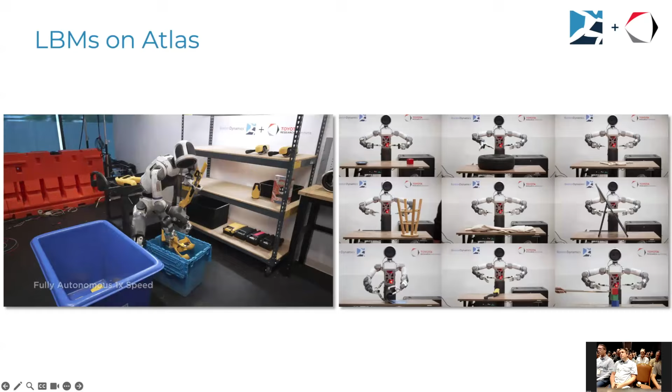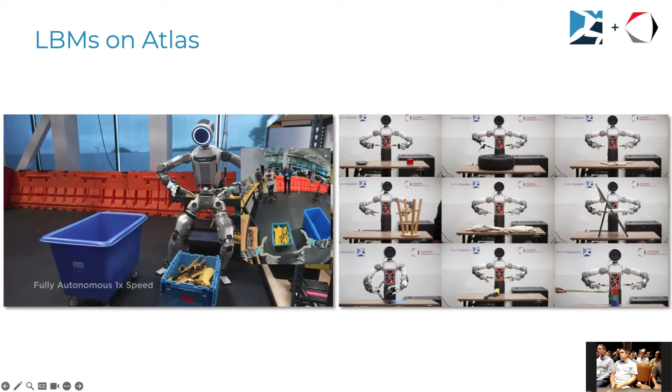It's a pleasure to follow Ben's talk because we've already set up what large behavior models are, and we can jump in here. So what you're seeing on the left is an end-to-end neural network policy, which is mapping images to actions. This policy is able to control the full range of our Atlas humanoid robot. It's able to take steps, crouch down low, reach up high, control the grippers, and control the neck to aim the head and get novel camera views. And it's doing that to complete this task here, where it's emptying this blue bin of parts and putting them into the wheeled bin.

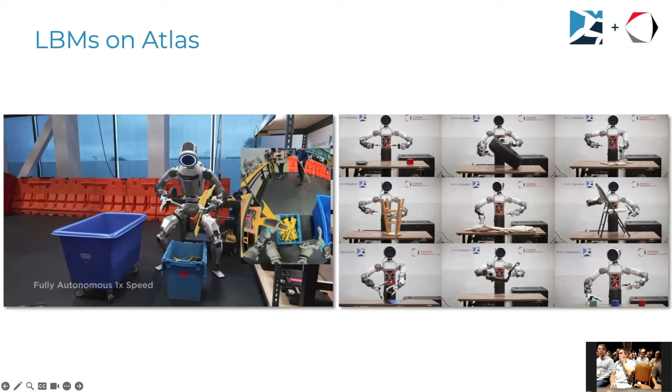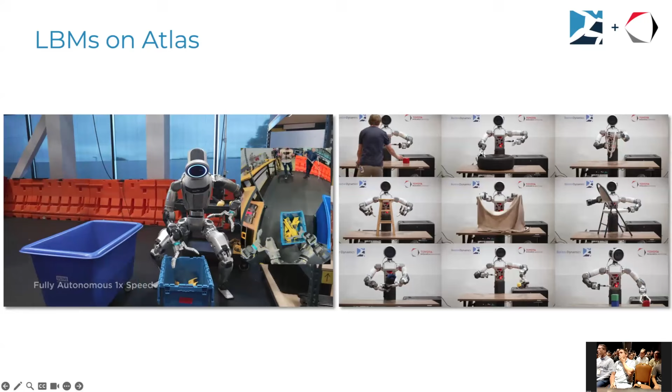On the right, you're seeing the same approach applied to our manipulation test stand, which is similar to the Atlas humanoid, but just the upper body only. Here, this is a single policy trained to complete a diverse set of tasks, including unfurling a tablecloth, tying a knot in a rope, and flipping over a car tire, for example.

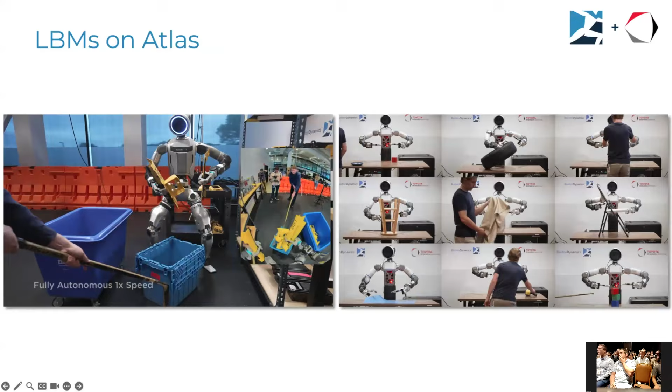As you can see, the policy is able to be reactive. If I move the bin away with the hockey stick, then the robot notices that change to the environment and reacts with its actions to pull the bin in close.

So the approach we're doing is behavior cloning, where we're going to take the binocular fisheye RGB images from the cameras on the head of the robot, as well as proprioception, so that's like joint positions and end effector poses and other robot state information, and a language prompt. Put that into the neural network, which is then going to predict a trajectory of actions. And those actions are then going to be executed by the low-level controller, in our case, the Atlas Model Predictive Controller.

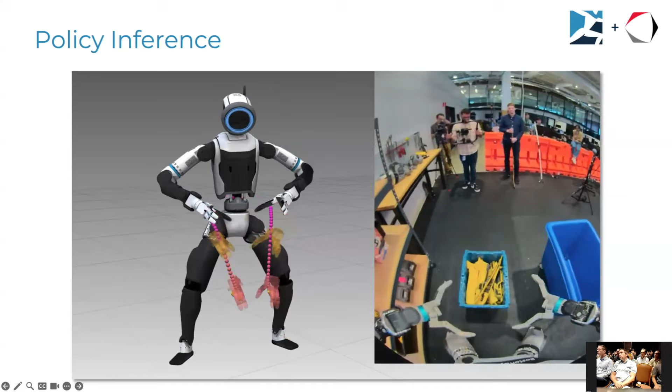So here's sort of a robot eye view of the policy predictions. On the right, you're seeing one of the images. The robot has two sort of stereo views here. And on the left, you're seeing a visualization of the actions predicted by the policy. All the videos in this talk, by the way, are at real-time speed, 1x speed.

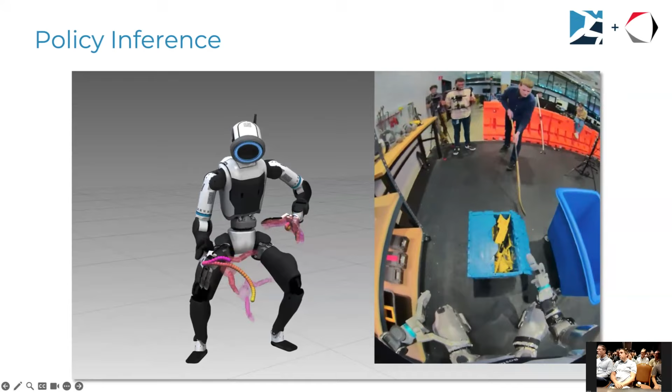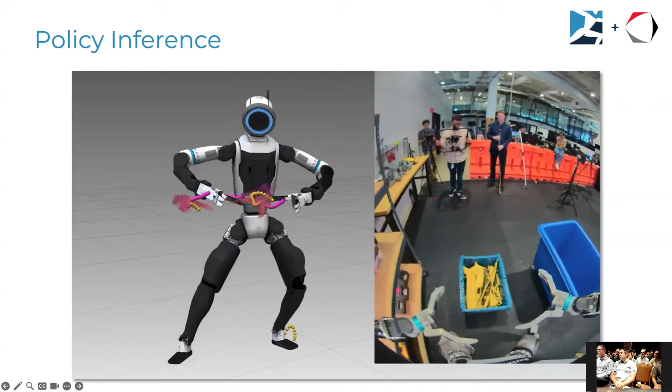So the dots you're seeing represent the positions of end effector poses, but it is predicting full 6-DOF poses for the end effectors, the feet, and the body. And the policy is predicting and updating. So every time you see an update is a new prediction. It predicts forward a horizon of actions into the future. And the controller is going to begin executing that trajectory. And while it's executing it, we're going to get a new observation and sort of switch to the new trajectory.

So behavior cloning requires a source of expert demonstrations. We developed a whole body teleoperation system to essentially pilot the robot to carry out these tasks and record expert demonstrations. So I'm going to present the Teleop system now.

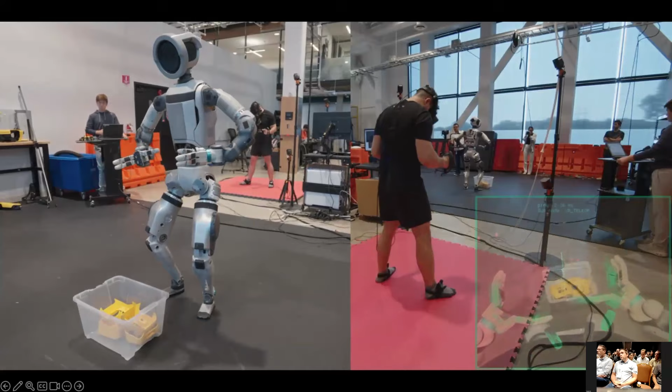This was largely developed by Kevin Bergman, who presented an even more detailed view of this earlier today at the Baymax workshop. So what you're seeing here is a side-by-side view of Kevin teleoping the robot. You can see Kevin here on the right and the robot on the left. He's actually in the background too, so you can see him with the robot. He's wearing a VR headset, and the VR headset is showing him the images collected from the robot's cameras. This gives him situational awareness, and he can control the robot using 6 points of tracking. There are trackers on his hands, on his feet, on his body, and on his head. He can crouch his body, sway left and right, or even take steps in order to complete this task. The inset view in the lower right is what he's seeing. In addition to seeing the view from the robot cameras, he also has a view of his own actions, which are these green overlays. I'll get into those in a little more detail.

Question: how skilled is he at not the task, but at controlling Atlas to do the task? It helps to have experience. Kevin is a very skilled teleoperator, particularly because he implemented the system. But he's not the only person that can accomplish a task like this. If you step into the system at the very beginning, you will not be very skilled. You do need to practice tasks for a while. It looks like he's being careful about foot, body, location, everything. Absolutely, and his awareness of what the robot can and can't do. More than him just doing what he wants to do the task. Yep. And then to do a task quickly and fluidly is different from just doing a task roughly. You can sort of stumble your way through and complete a task, but if you want to create a really nice demonstration video like this, you will want to practice and understand the dynamics of the robot and the controller, because you are teleoping on top of this system.

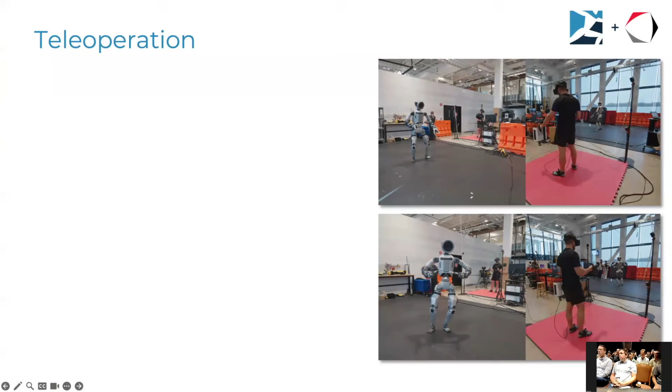So to design a teleoperation system, let's go through the requirements. First, we want a teleop system that can control the whole body to perform these tasks, meaning stepping and moving around, reaching all the way down to the ground.

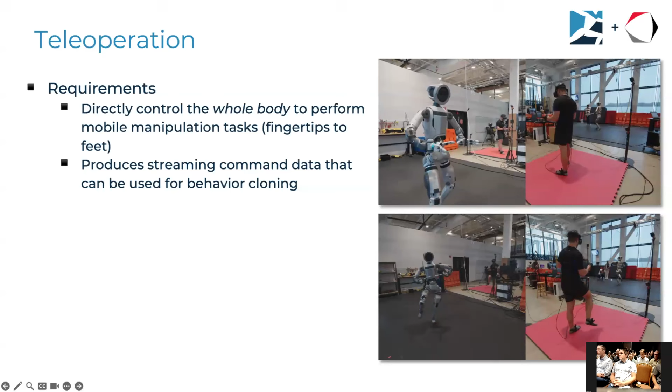That set of requirements made us make some design decisions, as well as we want the teleop system to produce a stream of commands which are learnable by the policy. You can make a very complicated teleop system, but you want to make sure your teleop command stream is aligned with your action space that the policy is actually going to be able to learn.

At the top left, you're seeing Kevin catching a bike tire as it's rolled to him. That's demonstrating he can be reactive. The latency is low enough - not zero latency, but low enough that he can react to things in the environment, and he can time a swing of the hand with opening the gripper to throw objects.

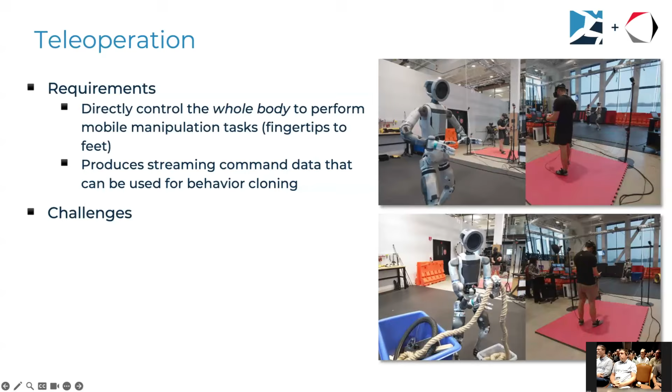There are challenges with developing a teleop system for a humanoid. First, line of sight is a challenge. If you weren't wearing the VR goggles and you were just going to stand next to your robot and observe it, you wouldn't have so much latency to be the problem because you'd be able to see things in the real world. But there would be problems with occlusions - the body would often be blocking the interesting parts of the manipulation task, or if you're reaching into a shelf or a bin, you just wouldn't be able to see.

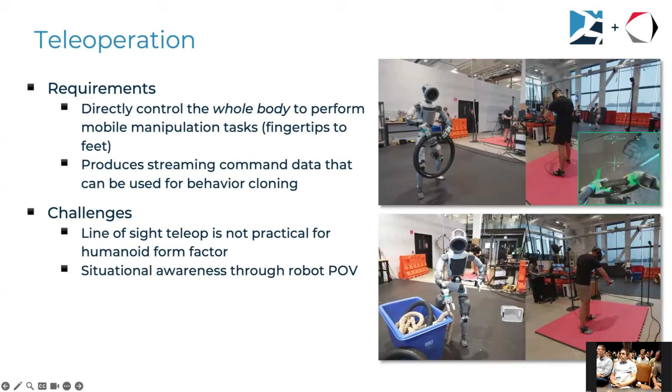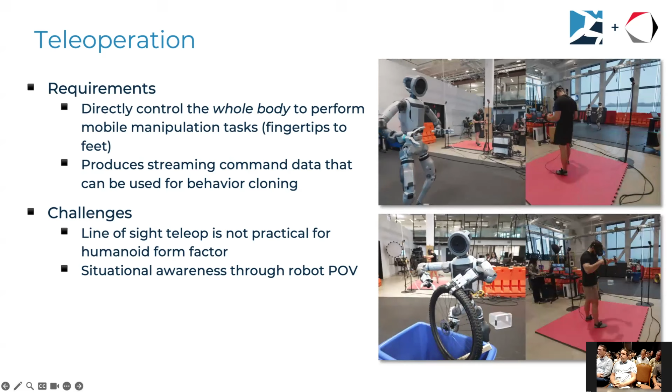So our decision was to have the operator actually look through the robot's own cameras and get a point of view from the robot. A side benefit of that is that the teleoperator's information is limited to the same information that the policy will have - they're not able to use some line of sight view that the policy would not be able to observe when it was running.

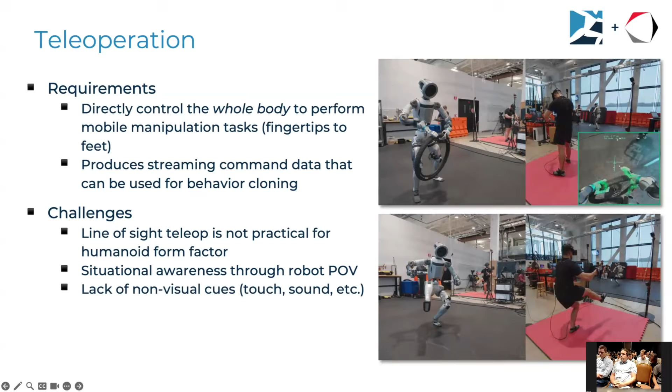Although we believe we developed a very high performance teleop system and we can do a lot of tasks with it, there are inherent limitations through this technique, and there are some challenges - it does require practice.

One issue is lack of non-visual cues - no touch, force feedback, haptics. You're teleoperating in the air with trackers, so there's nothing attached to your body giving you a real feel for what the robot's feeling. In this case, he's within the same room, so if he touches something, he can hear that. But if you were more remote or in a noisier room, you might lack those cues. Audio cues are really helpful for a lot of manipulation tasks - it's amazing. The policy, though, would not have those cues right now.

A real challenge with teleop is that the controller is essentially reacting to you - it's trying to mimic what you're doing. And that can be challenging. I'll go into a little more detail about that.

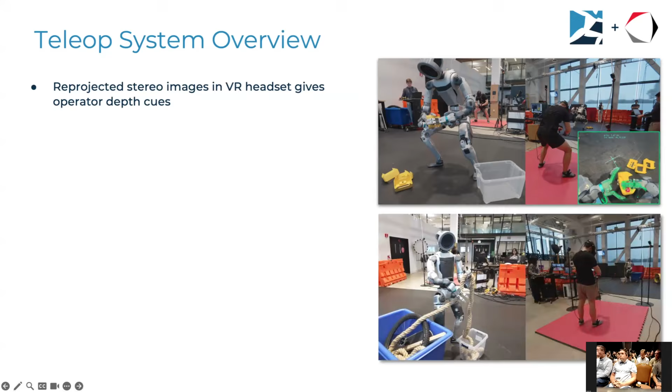What is he seeing in his VR goggles? He's seeing a reprojected view of the stereo images in his headset, so it's very 3D immersive - like watching a 3D movie at the movie theater where you feel like you're in the world and can just reach out and touch something. You get these really strong depth cues, and it's rendered such that if you move your head around, you can look up and down. The robot actually doesn't have a neck pitch, but it's sort of this big window, this 3D window in front of you, so you can look down like you're looking out into the world.

We use augmented reality overlays of the devices. So you're either wearing gloves or holding controllers, and those get retargeted onto robot grippers. We render those grippers - you can see in the image there as these green ghosts. A nice feature is that they move instantaneously, like playing a video game. You're refreshing the view at a very high rate, higher than the robot's cameras are coming back, so you get instant feedback about where you're moving. It's like a carrot on a stick - you're leading the robot, and it's going to catch up.

This helps minimize the act-and-confirm pauses, so you don't have to move and then wait to see if the robot moved where you are. You can sort of guide it with the green avatars, and the robot follows you very well. With practice, this is very intuitive, and you can do some very dynamic manipulation tasks.

I just saw the three-finger gripper switch around to a different configuration, right? Yes, it just flipped the thumb over. How does he control that? We have a few control modes.

One is if you wear 5-fingered gloves, and then we retarget that to a 3-finger robot gripper. But what he's doing here is he's actually just using VR controllers, which have buttons and a trigger interface. The trigger servos between an open pose and a closed pose, and the buttons cycle through different grasp modes, so you can have a parallel mode, a curling mode, or a flat palm hooking mode.

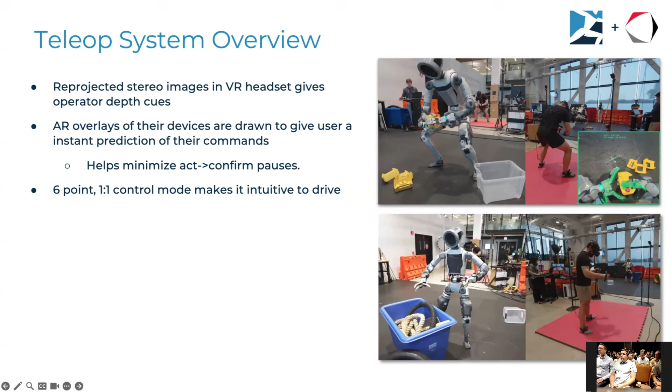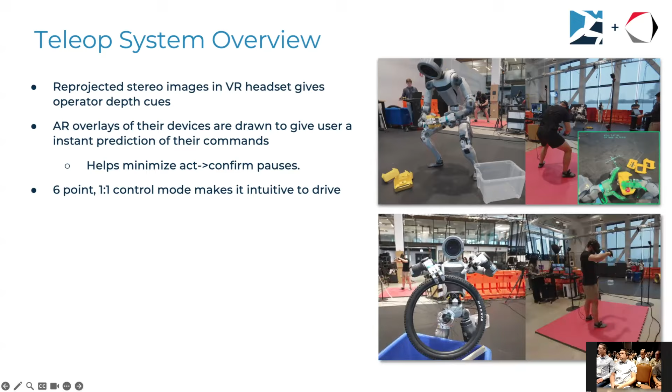From the policy's perspective, it doesn't know or care — it just sees finger positions and it's going to learn finger positions, so it doesn't care what grasp mode you may have selected. We think the gloves are great — they're very dexterous, you can really do a lot with your fingers — but they're a more complicated device, and there's a lot of tasks you can accomplish just with the controllers.

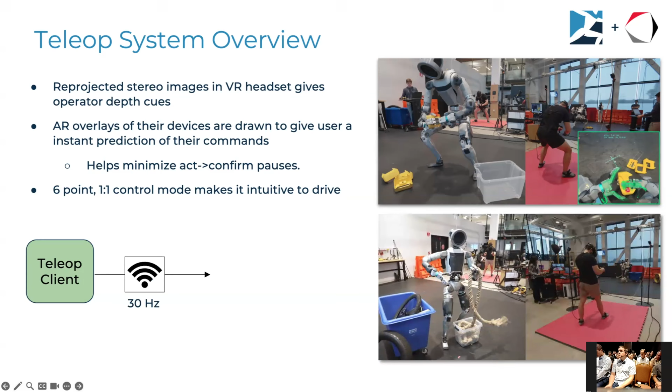So we have this using PC VR. We have a desktop that runs software called the Teleop client, and the Teleop client is in charge of sending commands to the robot. Those commands come from the 6-point one-to-one tracking, and they go to the robot, which is running MPC at a higher rate, tracking these set points that come in.

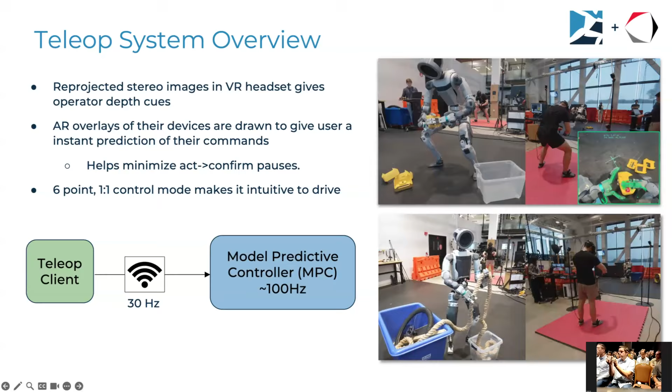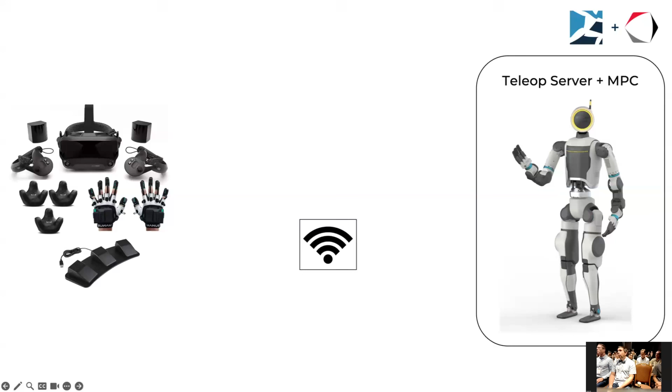To take a closer view of the system, on the right here we have the robot running its MPC control and a piece of software called the Teleop server. The Teleop server converts these Teleop commands into specific commands for MPC. The robot, over the wireless network, sends robot state — both the kinematic state as well as the images — to the Teleop client.

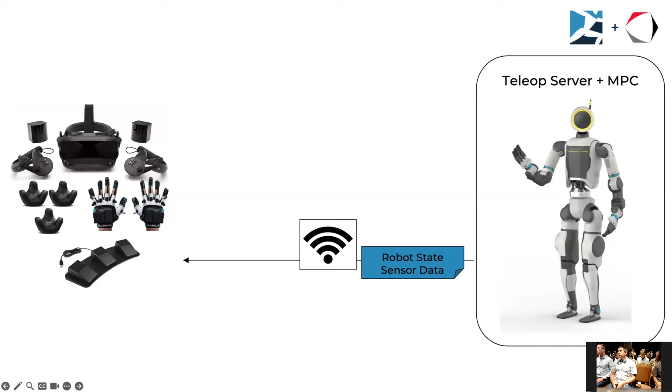It's a pretty simple data structure — it's the finger positions of the gripper, it's the neck position of our one-DOF neck, and then it's 6-DOF poses for the hands, the feet, and the body. And it turns out that's the same as our action space.

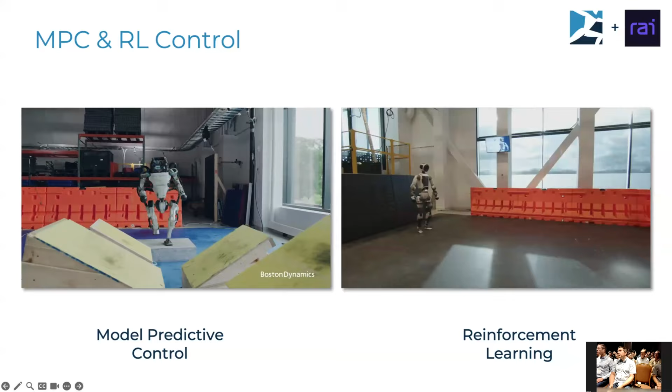So let's look at what the hardware and controllers are capable of. On the left, we're looking at our model predictive controller, which has been developed at Boston Dynamics over the previous 6 to 7 years. It's been shown to be incredibly capable, as demonstrated in our series of parkour videos — it can run, jump, and backflip its way through an obstacle course.

But MPC has limitations, and one of its biggest limitations is it can do all of these amazing things given an accurate state estimate and model of the world. But if it can't have that, then MPC can't really control the robot as well.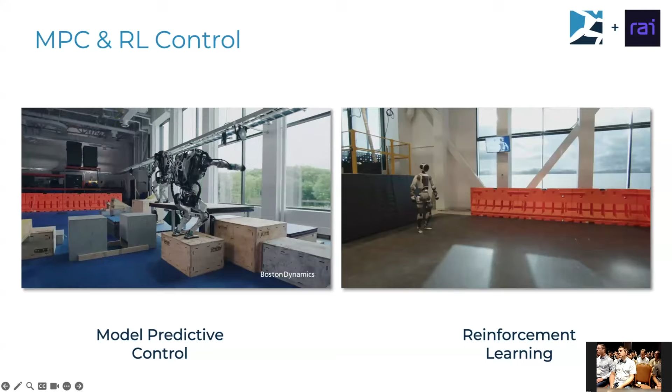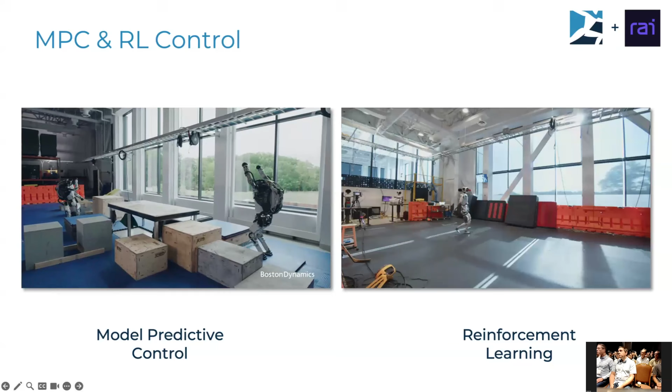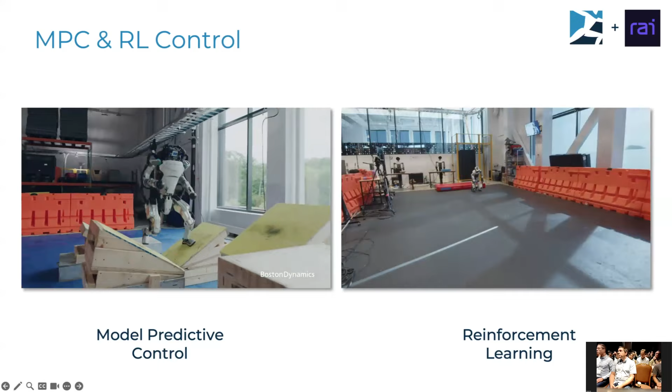So nowadays, what we're seeing is reinforcement learning-based controllers, which are trained in sim and then transferred to real. This is work on Atlas in collaboration with the Robotics and AI Institute, showing our recent work on deploying RL controllers on Atlas, which have been very robust and can do a lot of interesting behaviors, even in the face of rich contacts that MPC would have had to explicitly model.

Let's let this video play a little longer so you can get to the dancing.

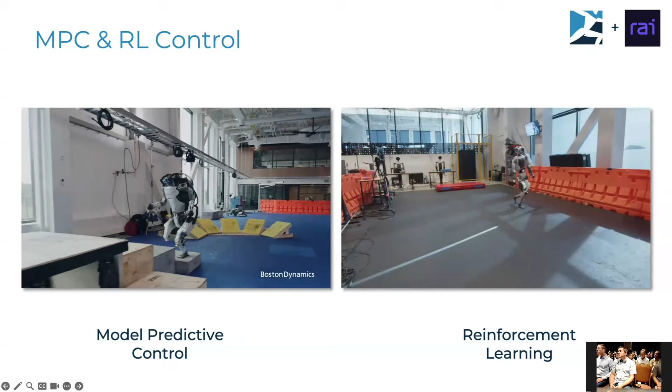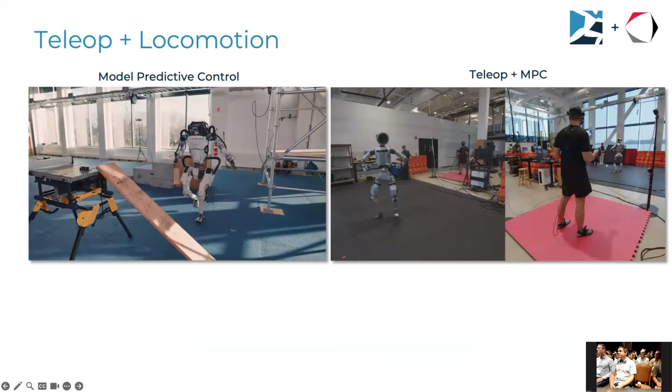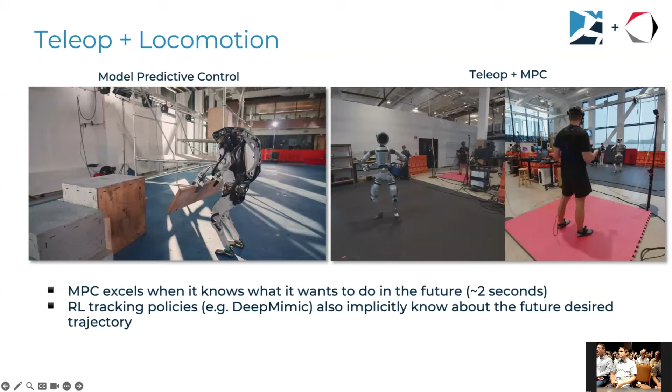MPC excels when it knows what it wants to do in the future. If you give it a future horizon of desired actions, MPC can plan and choose what to do right now to achieve that future. RL tracking policies similarly implicitly know what they want to do in the future, but the Teleop system is more reactive by nature.

This video is showing Kevin doing one-foot balancing. If you just want to track end effectors, you can be quite fast and have a very low reaction time. But when it comes to the feet, you can't just instantaneously pick up your foot. You have to know that you want to pick up your foot in the future, then lean and shift your weight, and then you can pick it up.

That's an inherent limitation, and we address it by having a delay line added to the feet. If you pick up your foot, we detect that through the tracker and convert it, for MPC, into a contact mode change of a liftoff, then a swing and a touchdown. You need to tell MPC either to stand forever on one foot or to touch down in the future so you can fall into your touchdown. So we do need to add some delay there.

Once there's a liftoff, it can more instantaneously attempt to track your foot and try to get a precise touchdown location. But you'll notice that when he lifts off in the video, the robot takes just an extra 500 milliseconds before it tracks you. So far we haven't found this to be a major limitation in accomplishing locomotion and manipulation tasks.

The hands are tracked very quickly. You just have to step into place and the robot will catch up, and then you can go in with your hands. We definitely want to improve that, and we think RL systems are going to offer a tool to be even more reactive and faster, and encode more motion predictive data inside of them.

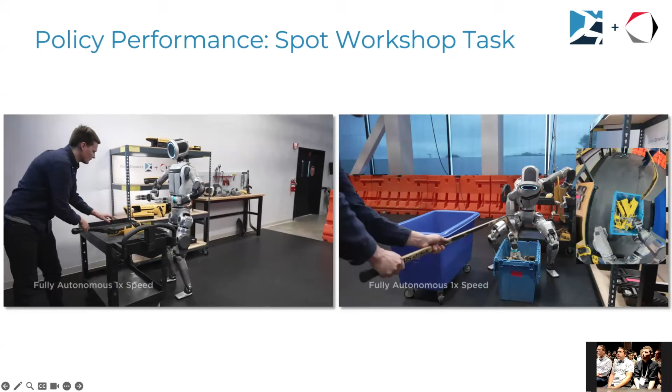All right, let's look at the task we've been demonstrating this on. We call this the spot workshop. It's a variety of tasks where the robot is manipulating these parts coming off of a spot robot. Here it's picked up a spot leg, does some regrasps, and then folding of the articulated leg.

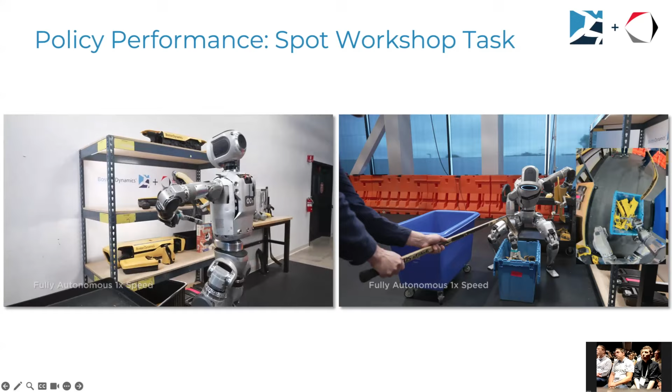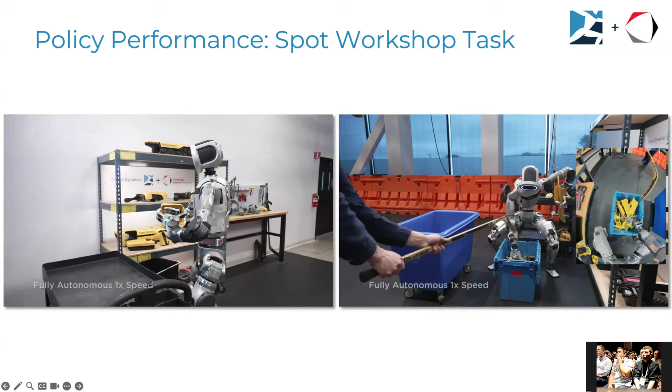Then it's going to find a spot on the shelf and reach into this constrained area and place it down. It's stepping to turn to face the shelf, and then stepping to come back and stand in front of the cart again. Now it's grabbing a spot faceplate part and going to crouch down low this time, pull out the bin, and place the part in.

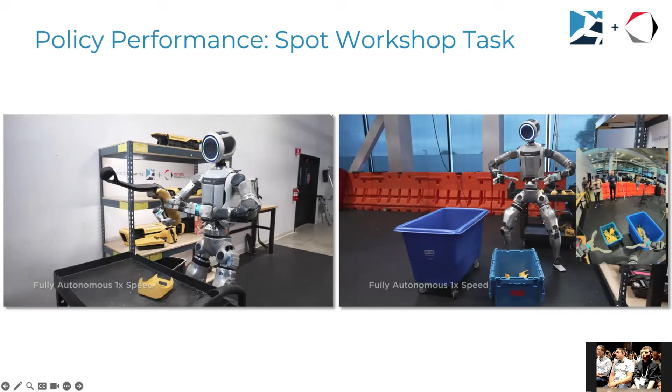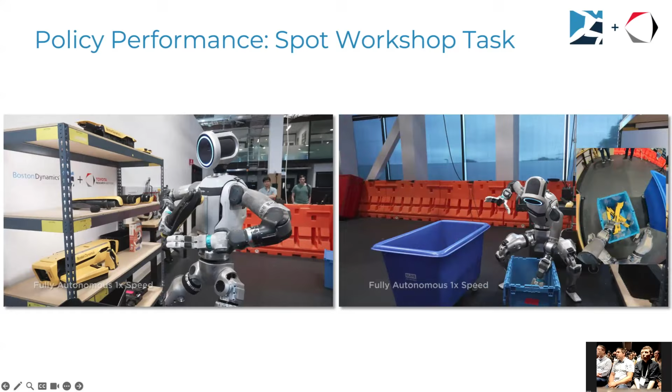On the right is the empty parts task, where it's got this blue bin that it can open and empty. When it's done emptying it, it pushes it away and recognizes the goal state. Throughout, it can be reactive to changes—of course, only reactive within the training data it has seen.

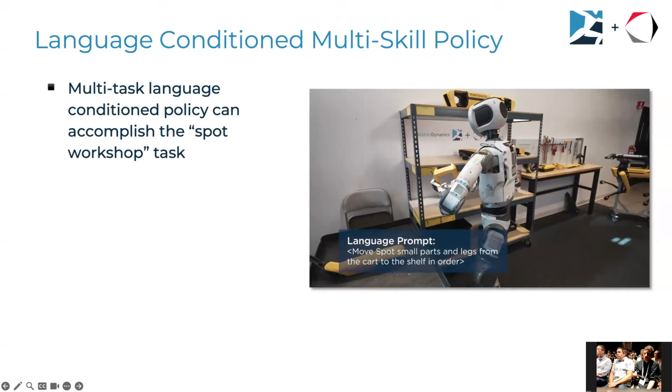We can also do this in a multitask, language-conditioned way. This video shows the same tasks, but this time we've taken all of those episodes and put them together with language annotations, which you can then prompt through natural language to tell it what to do next.

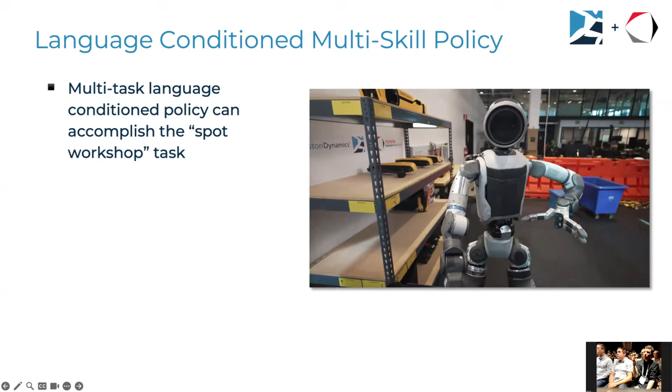There's no changes needed to the learning algorithm here. It's just the way you put your data training samples together—it generalizes and works this way. What's different is your data collection strategy. You need to make sure there's a way for these different tasks to flow one into the other so it can have transitions in between.

Anytime there's an ambiguous situation, like should I keep doing parts or should I turn around and look for the blue bin, that's where the language comes in. The language is telling you what to do. Language is fairly high level—it's not going to tell you where to put your hand. That's all still coming from the visual motor policy.

So I'm going to show you two examples of emptying the bin here. In this first one, there's a bit of dirty laundry—this is what a failure often looks like. It's crouching down, going for the grasp, but coming up short, emptying the gripper, and just keeps retrying. In this case, it tried with the right hand, then decided to try with the left hand, but it's coming up short.

On the right, we have a similar scenario, but this time it's able to just get that extra centimeter or two and get down low. So what's different between these two evaluation tests? It's really just the data—no algorithm or code changes were done. We just collected more data, more examples of crouching down low, and that helps.

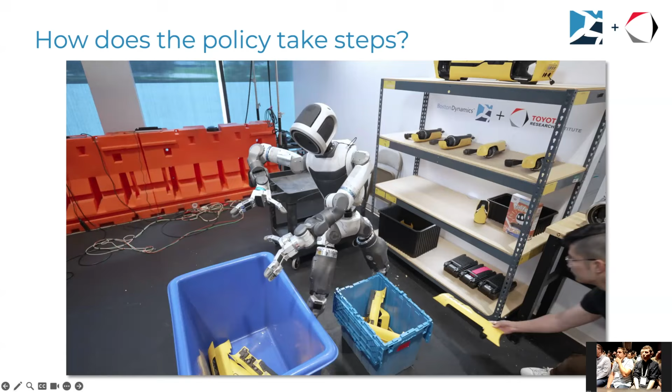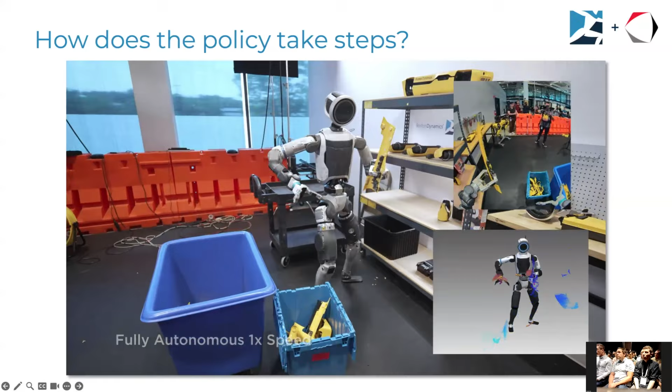How does the policy take steps? In this video, Russell is going to place a part on the ground, and we're hoping the robot will see that and decide to step over and pick it up. It's going to move the bin away, stand up, take some steps and grab it, then walk back over and place it, and continue. Again, this is not emergent behavior. This is training. There were training samples that showed how to do this. But how exactly is the robot able to take steps?

As you've already seen in the action space, the feet are just SE3 poses. So is there any difference between moving the end effectors and the feet? The answer is it depends who's asking. From the policy's perspective, it's exactly the same—it's just predicting trajectories of foot poses, and the robot just walks. That makes sure the learning problem is nice, simple, and general. It's just part of the action space, and the policy can learn to predict it.

But from the robot dynamics and controller side, it is very different. Especially with MPC, there's a contact sequence that it's following. So you need something on the robot side that takes this stream of poses and tells the robot it's time to break contact with a foot, go through a swing phase, and make contact again. We have that on board the robot in something called the Teleop server, and it's able to take a stream of foot poses and convert that into a gait, cleverly engineered so you can be very reactive and move your feet in a lot of fast ways. The robot will try to track you precisely, but it won't get confused and fall over or hover its foot—it'll do the right thing. This was a pretty important engineering design to get right when developing the Teleop system.

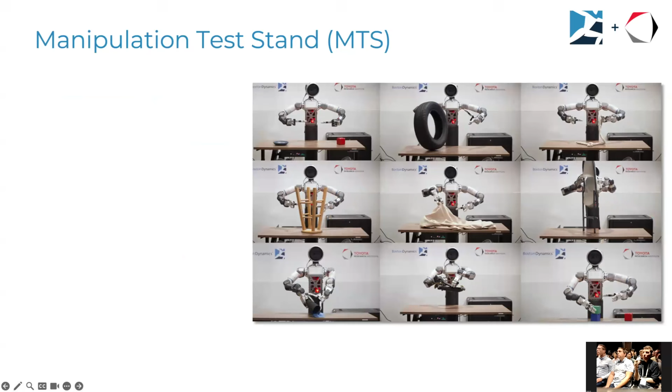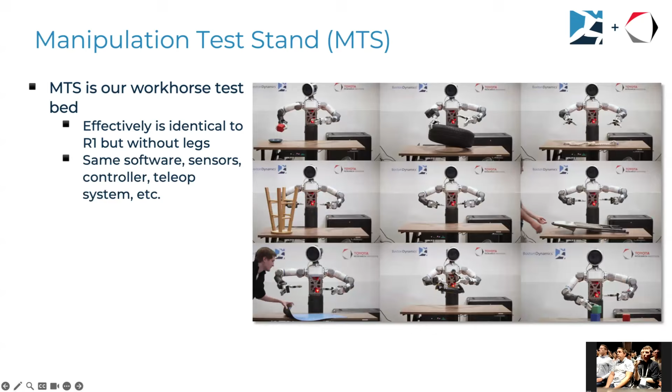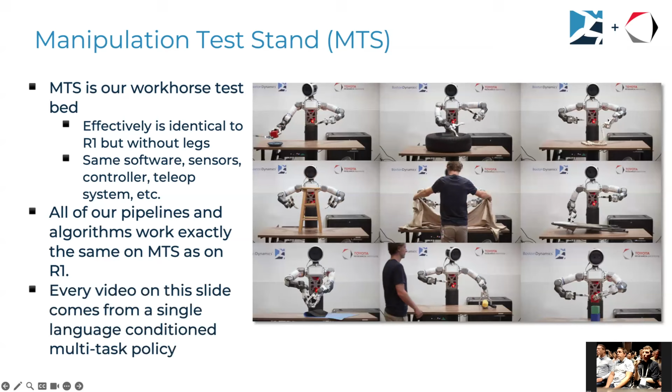I wanted to highlight, we do some of this work on our manipulation test stand as well. This is just like the upper body of the Atlas, and it's our workhorse test bed for doing science experiments, rapid data collection, and testing new ideas. It's effectively identical to the Atlas R1 robot, but without the legs. It runs the same software, has the same sensors on the head, the same teleop system—everything is the same, which is very nice. All of our pipelines and algorithms work just the same on MTS, so that's been a nice tool to have in our arsenal. In this video, every different task demonstration is all one policy, a multitask policy trained on all of the data together to accomplish all of these different tasks.

All right, let me go through some lessons learned now. We believe high quality data is the most important thing. We've heard a lot about the data pyramid, and the top is sort of where this work is presenting. If you have bad data, you're going to get bad performance, even if you have some fancy learning system. But if you have good data and a scalable learning system able to ingest all the data, then you can get pretty good performance. A key thing here is that we're essentially programming behaviors through data. Bad data is like bugs in your program, or like a poorly optimized program. You need to think about what you're training on and correlate that with the performance you see at evaluation time.

But collecting high quality data is hard. One, because it's hard to define—you can't just tell your demonstrator, collect good data; they need to know what that is. If you're doing an image annotation task, like drawing a bounding box or masks around objects, that's well defined—you can tell them make sure the bounding box is tight, and so on. But if you're saying empty this bin and do it well, what does that even mean? You really need to think about the tasks, think about robust manipulation strategies, and collect data in consistent, uniform ways that have inherent robustness built in. That's a big part of it, and that comes through the iteration cycle.

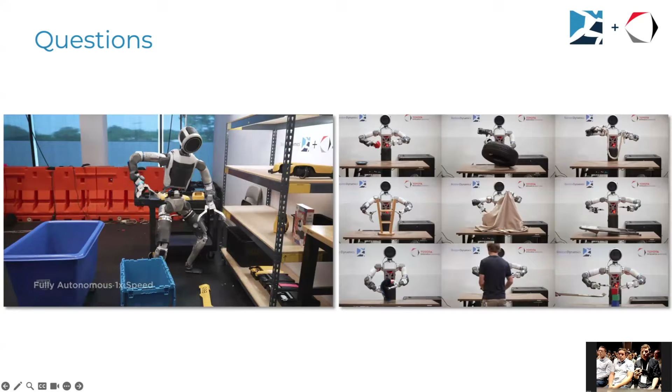Regarding your Teleop, if I understand correctly, you use MPC under the hood to track the high-level poses given by the motion tracking of the human, right? Yep. I'm wondering, is that because traditionally MPC has been a choice, or have you tried RL with imitation as a way to track that? What has been your experience?

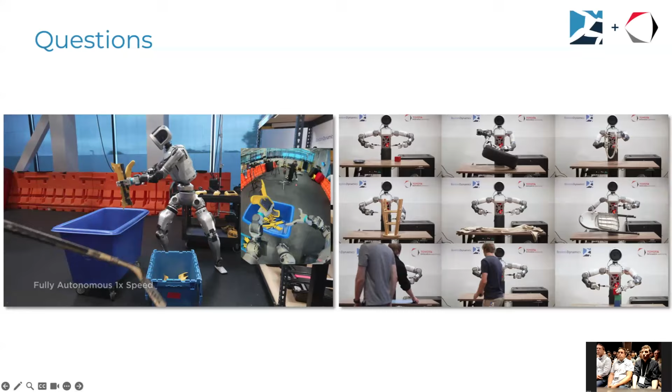Yes, we are doing Teleop on top of RL now. All of the results in this talk were on top of MPC. We started at a point where we already had an incredibly high performance controller through MPC. I think MPC still remains the best. I don't think it will for long, but one of the key features MPC gives us is the ability to have very high precision end effector tracking, even while the robot is in these very awkward positions. So you can squat low to the ground and want to pick that one thing up off the ground, MPC will do that. I think RL will struggle to accomplish that, but it'll definitely come, and we're already exploring what it can do in our lab.

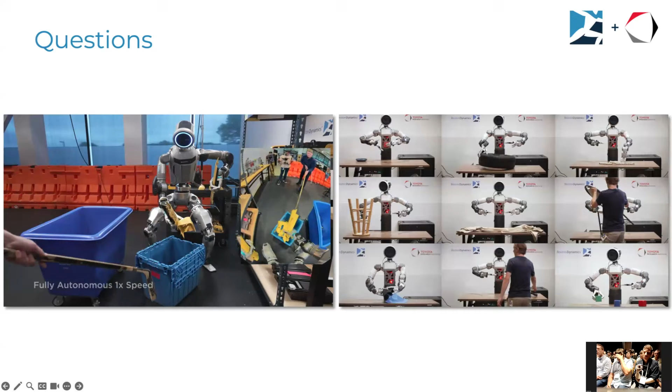For certain tasks such as the one where you're picking up things out of the bin and placing them, how prescriptive do you have to be about the exact flow? For example, using the right arm first before the left arm to place, or when you do a cross-body place after recovering to pick up the part from the ground, placing with the left arm.

Yep. For some tasks, we are more prescriptive, and I'd say that's mostly because we know we're going to collect a limited amount of data, so we want to limit the variation and try to be very intentional about the variation we put in. For this specific task where it's left and right, we gave no instruction and we encouraged them to do whatever felt natural at the time. So sometimes they would come in one-handed and empty, and then as you're bringing that hand in, you'd come in with the other hand and maybe do a double. They just did whatever they wanted for that, and we were able to collect enough data that the policy just sort of chooses. It's pretty cool to watch it in that case.

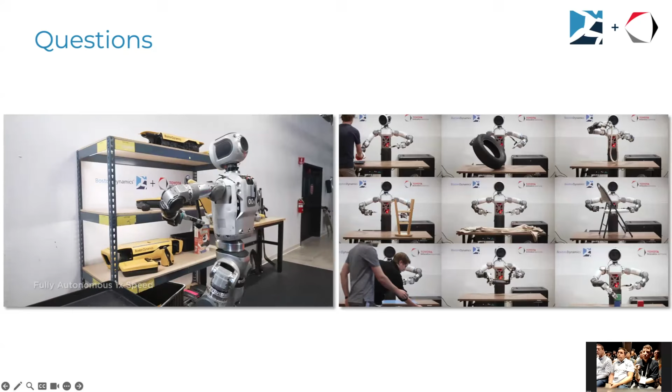Whereas picking up from the floor, for example, we wanted to show that it could do that, and within about a few days to a week we collected that data, but we definitely needed to limit the variation so that we could get good performance from a limited amount of data. But from there, you could continue to expand it so that it doesn't need to be so prescriptive. And when you did need to be more prescriptive, what were the failures looking like? Was it like getting stuck switching between two modes, or is that just a risk?

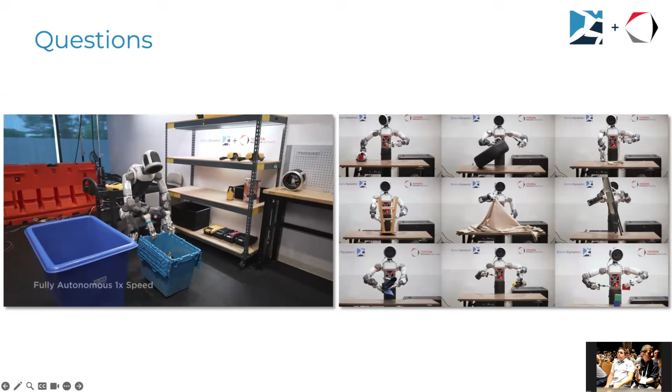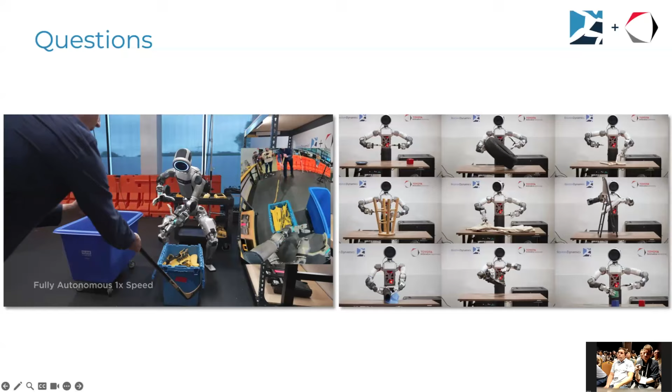I'd say that is a challenge of low quality or poorly curated data, in that you can see it do hesitations. Typically it won't hesitate between arms. Once it begins to move an arm, especially with the proprioception and visual state, it's pretty locked into using that arm. But one interesting thing is if it's going to pull the bin back into place, there's a point where the bin is just far enough that maybe it wants to pull it in, or maybe it just wants to do a grasp, and it might oscillate between those two until it commits to one of them.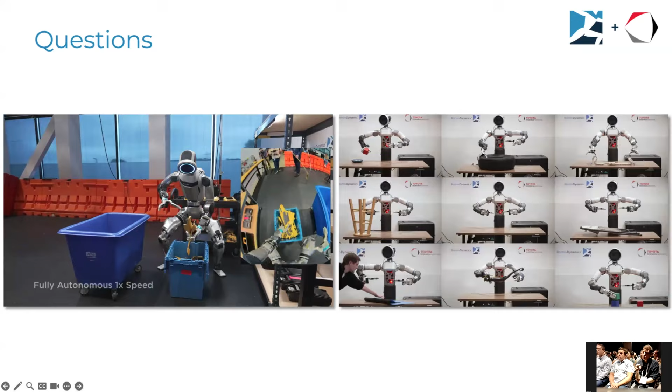Can you talk a little bit about the importance of your judgment in choosing what data to collect and how to collect it?

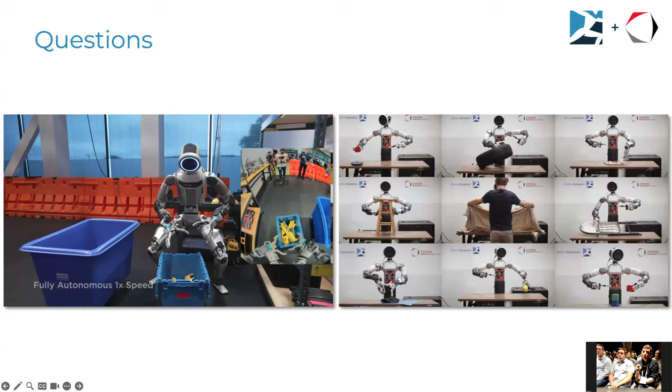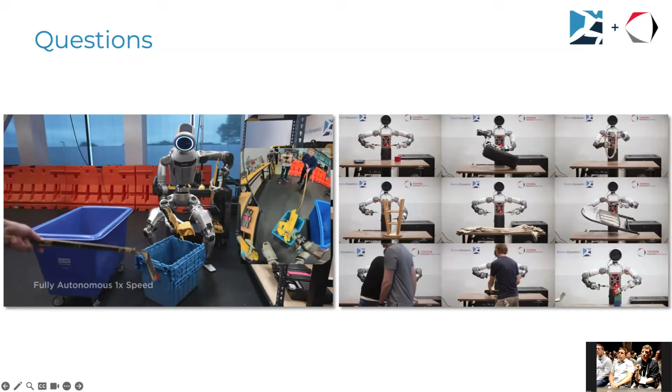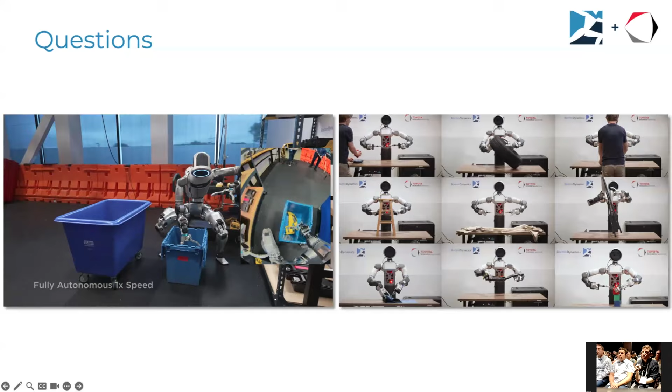That sounds an awful lot like cost function engineering to me. I would agree, it is an art form. I hope with large data scale this goes away, but for now that's a reliable way to get good performance - giving it the right data, which requires an expert to observe how the robot is failing and fill in data. You could compare it to cost function engineering or reward engineering, but I think it might be a little different. There's the DAgger concept where you let the policy fail, and that leads you to data collection.

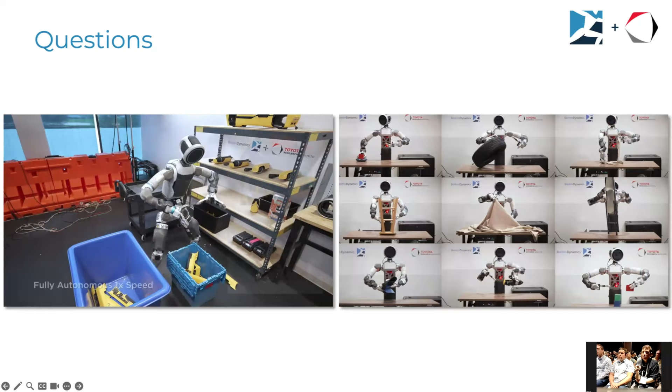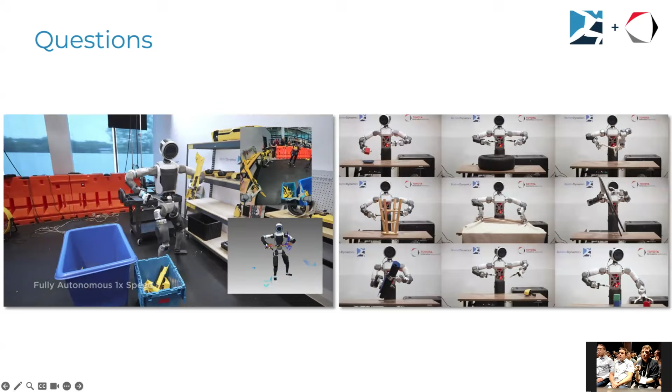So we think of it like DAgger, sometimes I'll call it almost like outer loop DAgger. We both do the traditional mode where you interrupt and correct it, but you can also see where it's failing and intentionally collect failure cases. There are some tricks to collecting failure cases intentionally, because if you have to intentionally fail, that means you have some window of actions that you don't want the policy to learn from, so you can label those.

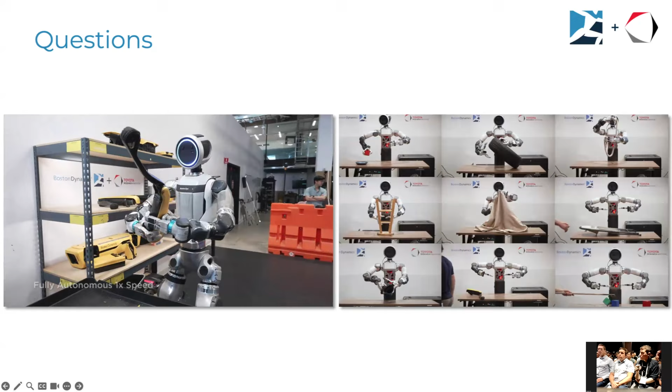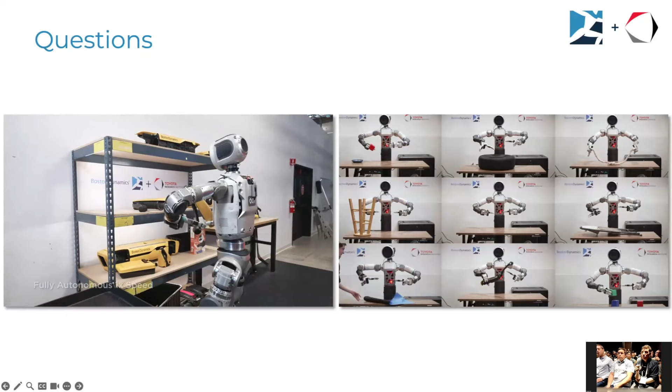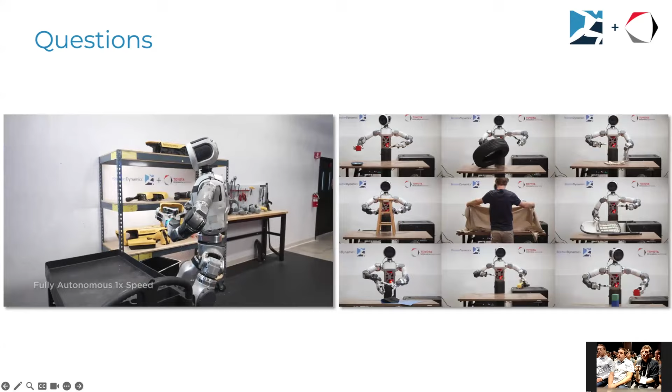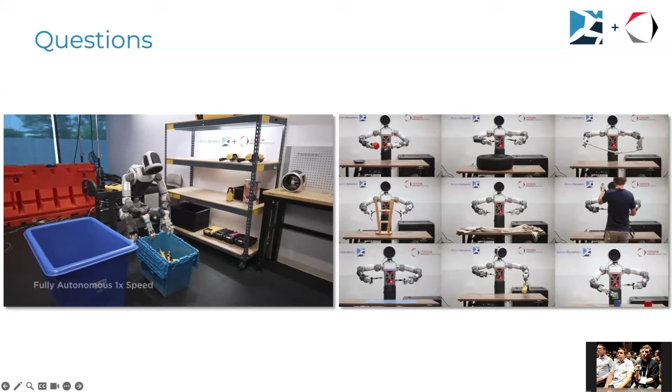They have ongoing fine-tuning experiments with this Atlas data set. This data here is trained just on Atlas data - it doesn't contain the big pre-training soup data. But I think there's a lot of benefit from that, and at this conference and the previous one we're seeing a lot of people exploring this space. I think what we're doing here is phase one of a multi-phase thing, where we want to know the absolute performance and capabilities on certain tasks. This isn't yet going for generalization. With the larger pre-training data, that's much more important for the generalization case, and that's going to be an important phase of this project, but it's not what's being demonstrated yet.

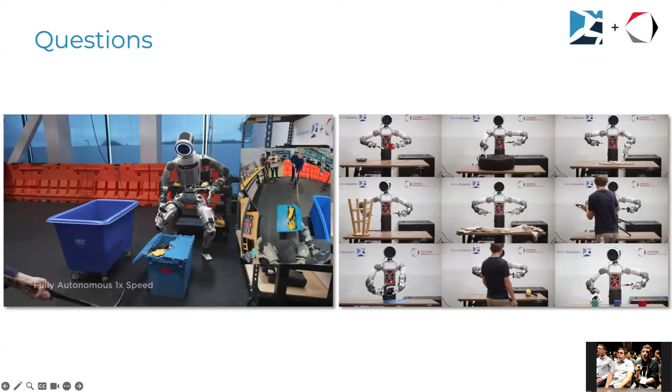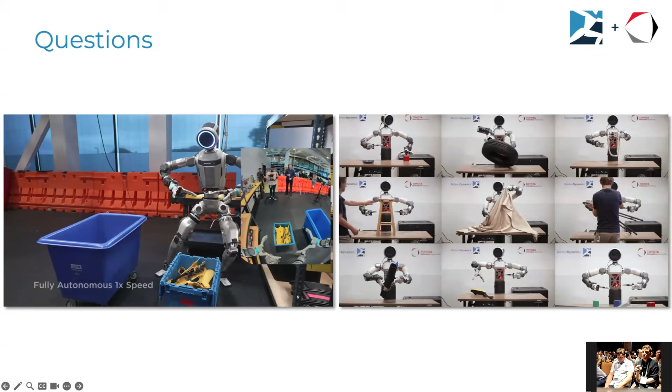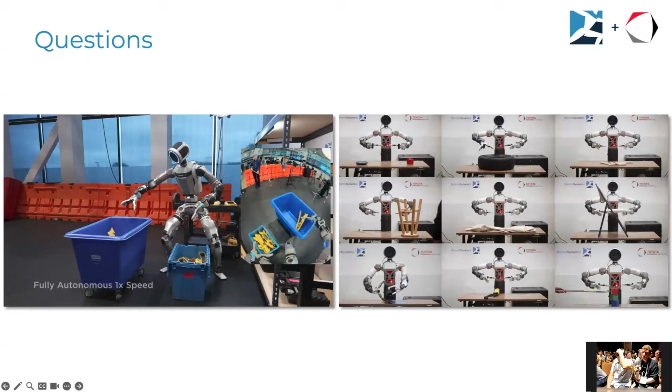If there's still time for a question - I'm curious because you mentioned you were quite satisfied with the performance of the teleoperation and in tracking the position of the hands. At the same time, you said that MPC is also problematic in reaching all possible dynamics, configurations. I'm curious, especially when grabbing things fast or heavy, did you have to play with impedance or compliance on the teleoperation? How do you think about those things, how do you decide the compliance between the VR controller and the gripper of the robot?

I think we're looking more at dexterous tasks right now, but heavy lift tasks are super valuable and important to us, so we are going to work on those as well. MPC is quite capable of doing it if you give it a model of the object, but then you're back to more like state estimation of the object. We know the controller is capable, but it's hard to communicate your intention that you're going to lift this, and before you lift you need to move your center of mass back to counterweight. So that's still hard - I think RL will solve some of these problems over time.